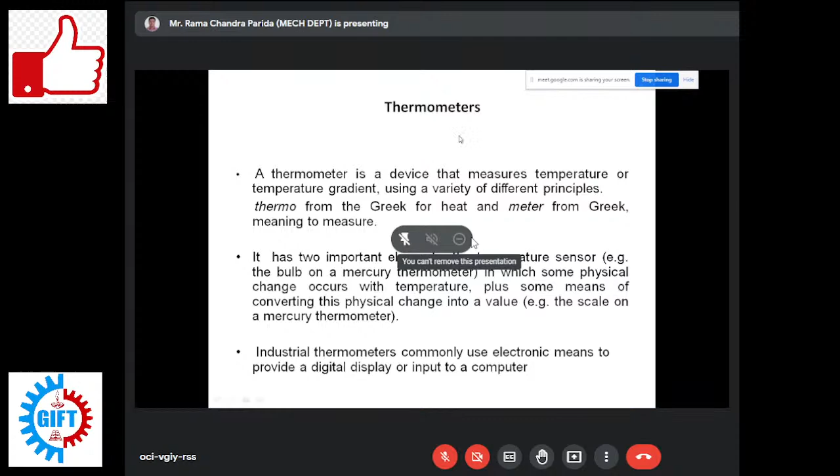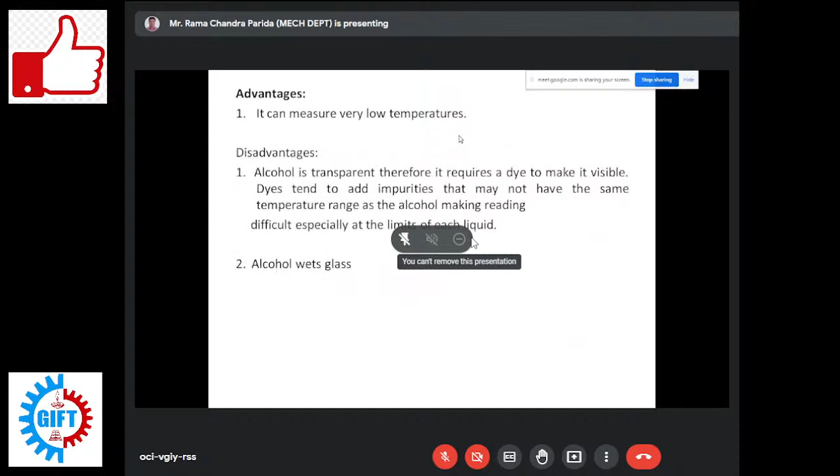This was the liquid in glass thermometer, which was discussed in the very last class. Okay. And what is the advantage of using alcohol, and what is the advantage of using mercury in that liquid in glass thermometer as a thermometric substance? Okay. So there is some potential toxic hazard of mercury, so we replace it with alcohol, but that alcohol can wet the glass tube, and also it is used to measure low temperature.

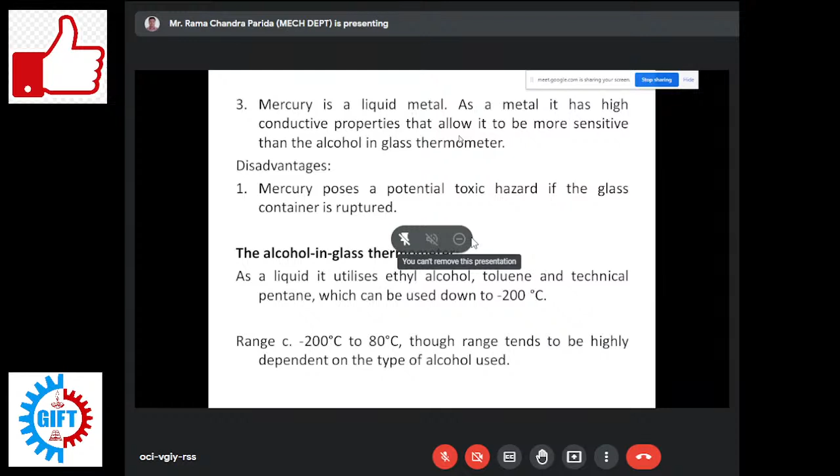Okay, then we started the bimetallic temperature measuring device. From its name, it is clear that it uses two different materials having different rates of thermal expansion. That means you can remember that the bimetallic temperature measuring device works on the principle that different materials have different rates of thermal expansion. When two strips of metals are bonded together and get heated, one side will expand and the other side will,

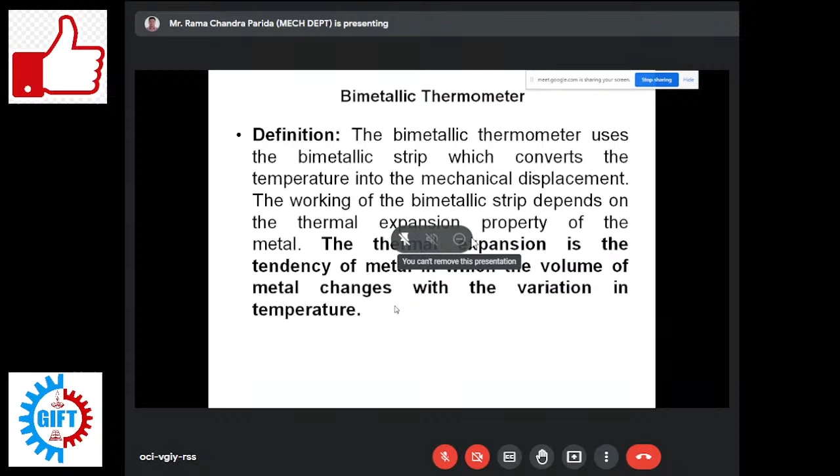that means one side will expand more in comparison to the other, and the resulting bending is translated into a temperature reading by a mechanical linkage. Okay, because the bimetallic strip has different thermal expansion properties, it bends, one end bends more than the other. This bending can be converted into a temperature reading by some mechanical linkage. That is the working principle of the bimetallic thermometer. You can see how it works. Here the bimetallic strip is bonded together, okay.

The metals are joined together at one end with the help of welding, okay. And since the bimetallic strip thermometer is constructed with two different metals, the length of the metals changes at different rates. So this is the working principle of a bimetallic thermometer. Here the bend of that plate or strip helps to record the temperature, hence its name is bimetallic

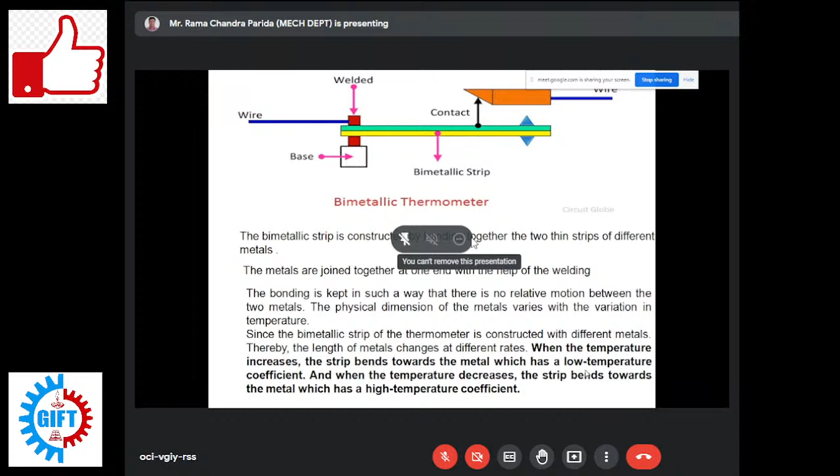thermometer. You have to remember this is another device, after the liquid in glass thermometer, used to measure the temperature of the body or system. Then you can see here how that strip of the plate gets bent when one end is heated, and this deflection can be converted into a reading of temperature through a mechanical linkage.

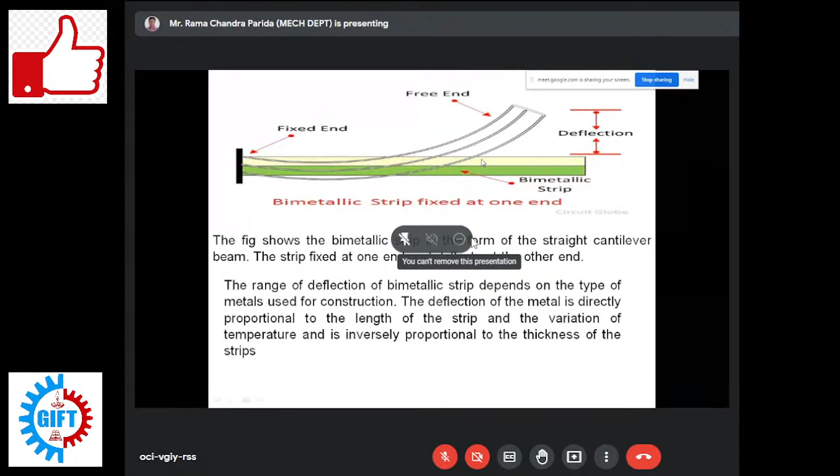You can see this is the bimetallic strip, and after the heating process, one end, called the free end, starts to bend, whereas the fixed end remains like that. That bending is called deflection, which is used to measure temperature in this bimetallic temperature device. How that bending happens, are you all able to identify it or not?

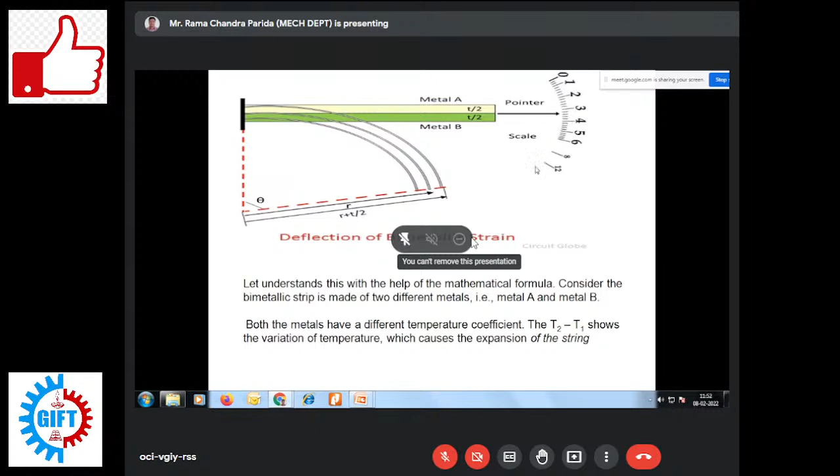This expression is not required for you because you only have to remember the working principle of the measuring device. So the diagram along with the working principle you have to remember and write. Suppose you are thinking how the spiral strip bimetallic thermometer works. In a bimetallic strip thermometer, when the spiral shaped strip is used, it measures ambient temperature because the thermal expansion property of the metal causes deformation in the spring with the variation of temperature. Here is the pointer.

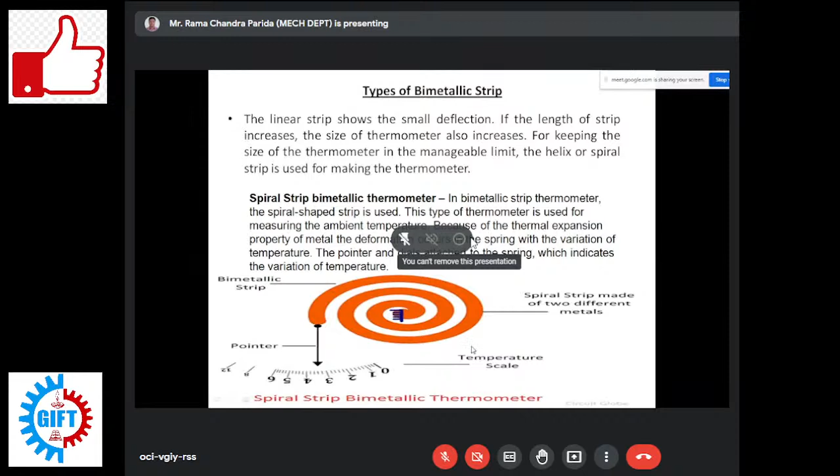Once this end is heated, it will expand, the free end moves, and it is graduated to some value, and corresponding to the pointer position, the temperature is recorded. Here another is the industrial type bimetallic thermometer. You can see how it helps to measure the temperature. It is another type of bimetallic strip, helix type. The earlier one was spiral type. Helix type bimetallic strip is mostly used in industrial applications.

Here a helix shaped strip is used for measuring temperature. The free end of the strip is connected to the pointer. The deflection of the strip shows the variation of temperature. This thermometer is simple in construction, robust and less expensive. Which one? This helix type industrial bimetallic thermometer. The thermometer gives less accurate results while measuring low temperature. That means this type of thermometer is used to measure high temperature. For low temperature, it will not show that accurate a value.

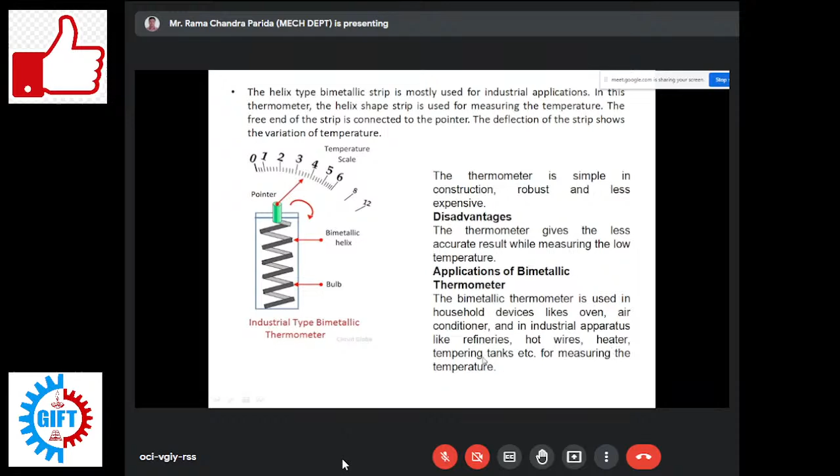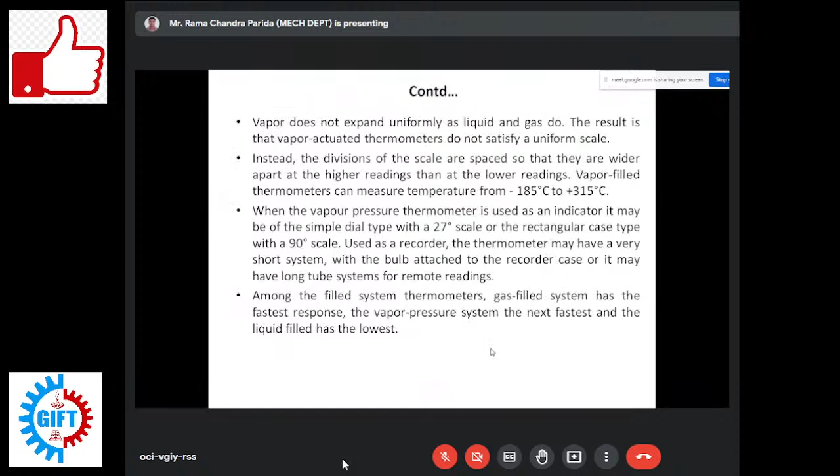And where is it used? It is used in an oven, air conditioner, industrial apparatus like refineries, hot wires, heaters, tempering tanks, for measuring temperature. Another one is the vapor pressure thermometer. This is not required. The gas filled: constant volume gas thermometer, constant pressure gas thermometer.

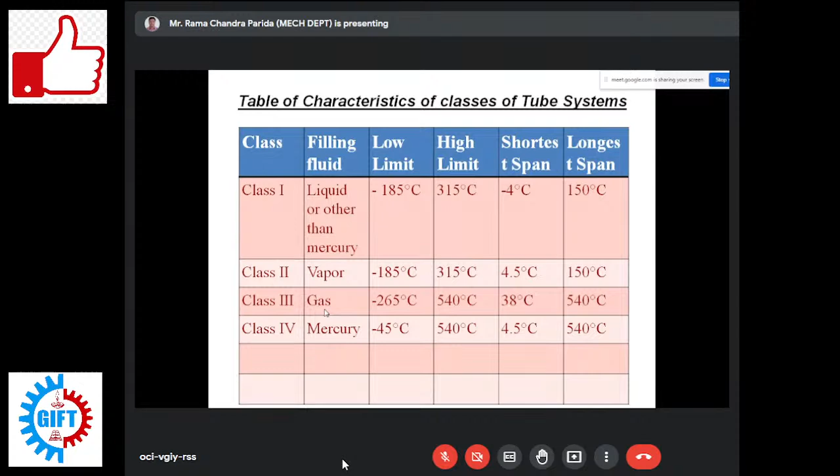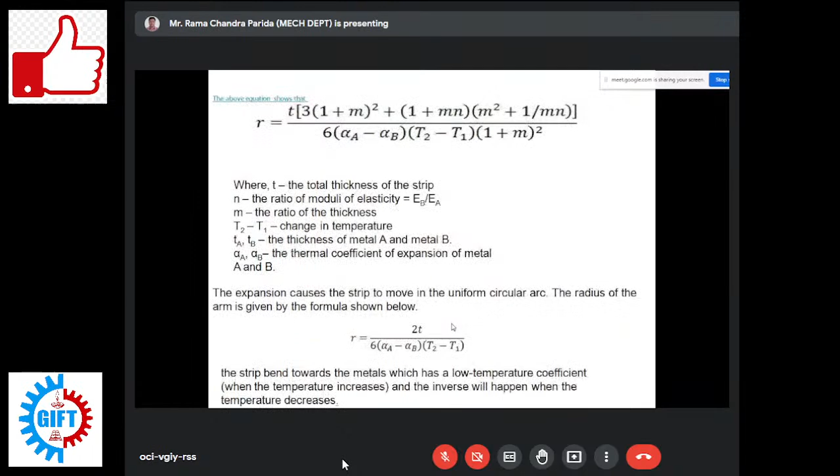You can see an EMF is generated. And this EMF is generated due to a combination of two effects: the Peltier effect and the Thomson effect. As the temperature goes up, the thermocouple EMF rises. This is the principle on which the thermocouple works.

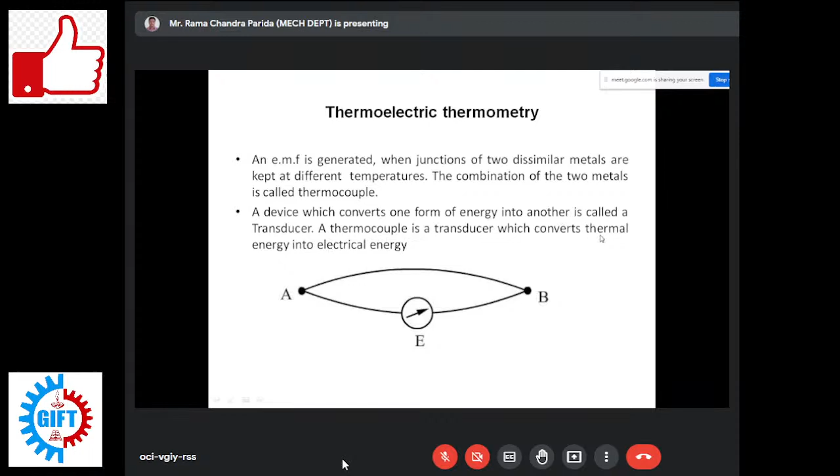An EMF is generated when the junctions of two dissimilar metals are kept at different temperatures. The combination of two metals is called a thermocouple. A device which converts one form of energy into another is called a transducer, and a thermocouple is a transducer which converts thermal energy into electrical energy.

Here you can see that because of two effects, your thermocouple works. One is the Seebeck effect. The magnitude of the EMF depends on the difference in temperature between two junctions. This is called your Seebeck effect. So dE_S is equal to alpha_AB dT. So you can see that EMF produced, capital E, S stands for EMF produced due to the Seebeck effect, is equal to alpha_AB. Alpha_AB is the Seebeck coefficient, and dT is the temperature difference.

So you can see from this expression that your magnitude of EMF depends on the difference in temperature between two junctions. Okay, so based on this effect, your thermocouple works. Remember, this first one is the liquid in glass thermometer, second one is the constant pressure gas thermometer, constant volume gas thermometer. Then we discussed the bimetallic temperature measuring device or bimetallic thermometer. Then we are discussing the thermocouple.

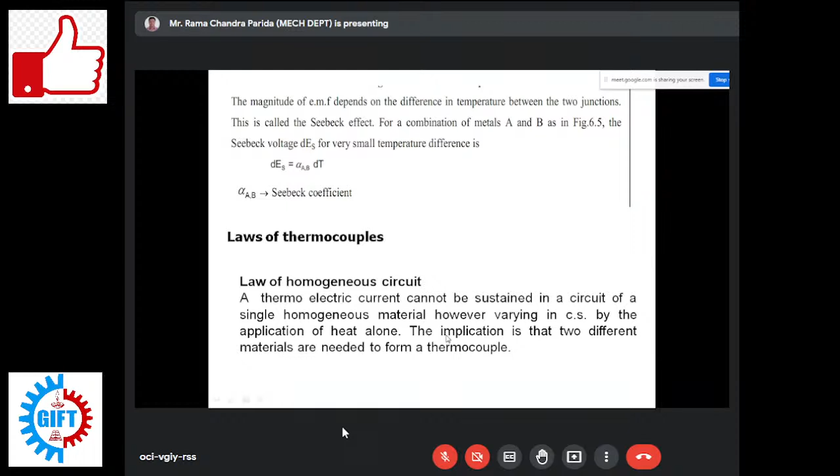So the bimetallic temperature measuring device works on the principle that two different metals have different rates of thermal expansion, so because of the resulting bending, your temperature is read by a mechanical linkage. So that was the principle. You remember, I repeatedly told you that this is the principle you have to remember along with the diagram, and then we can write it. Then we are discussing this thermocouple.

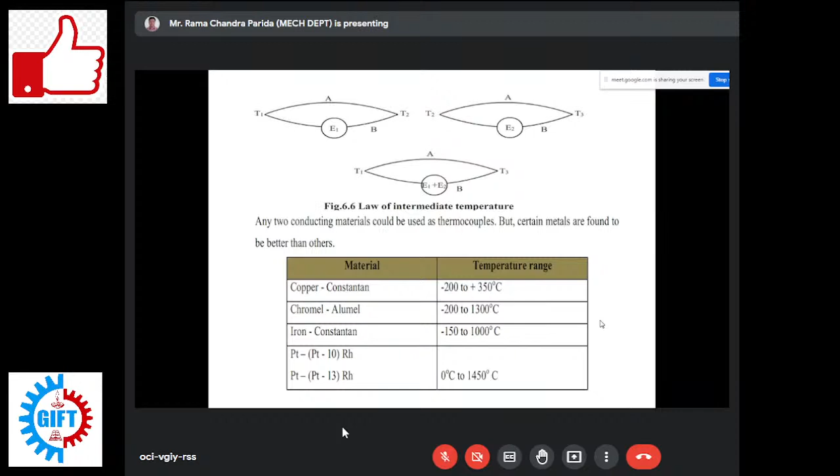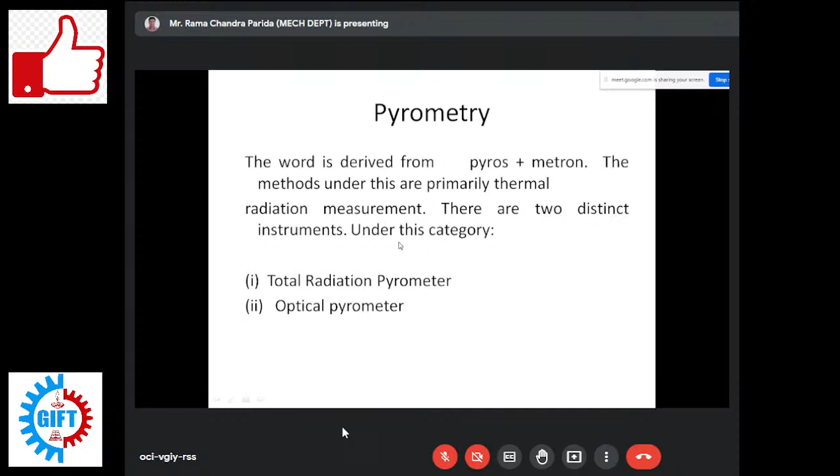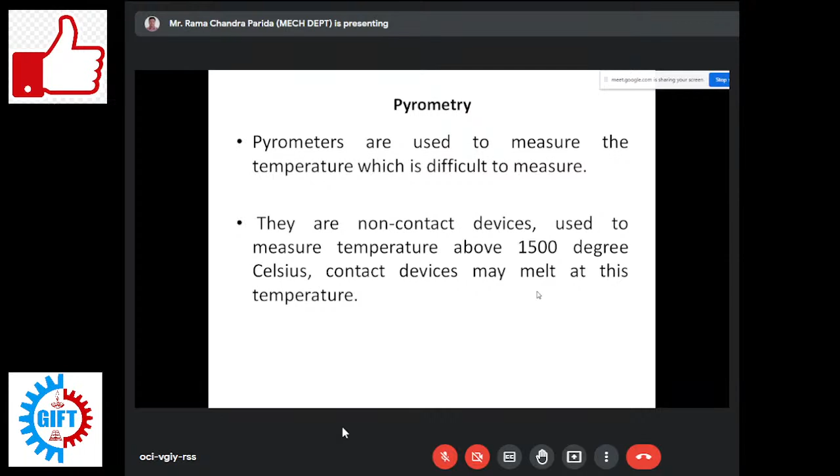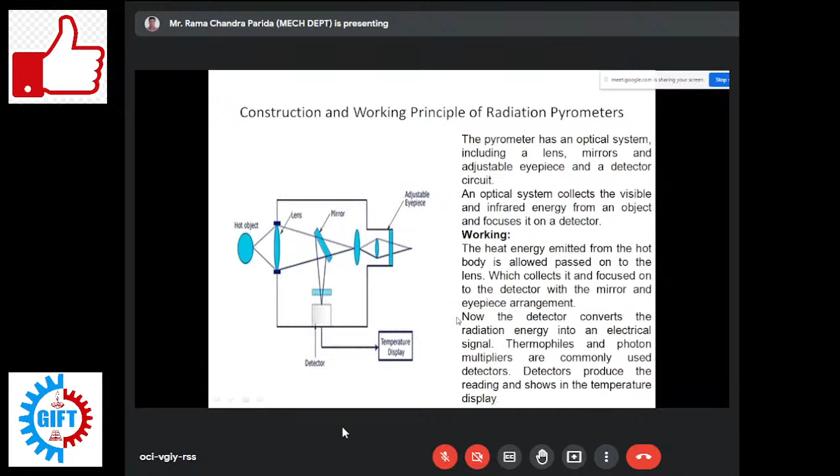So heat energy emitted from the hot body is passed on to the lens, which collects it and focuses it on to the detector with a mirror and eyepiece arrangement. So now the detector here, you can see in this diagram, converts the radiation energy into an electrical signal. That is displayed in the form of temperature. So this is the working and construction of a radiation pyrometer.

Advantages are low cost and no need of contact. This is non-contact type, fast response. It gives the response with more speed, faster response you can call. The disadvantage is that emissivity errors are introduced.

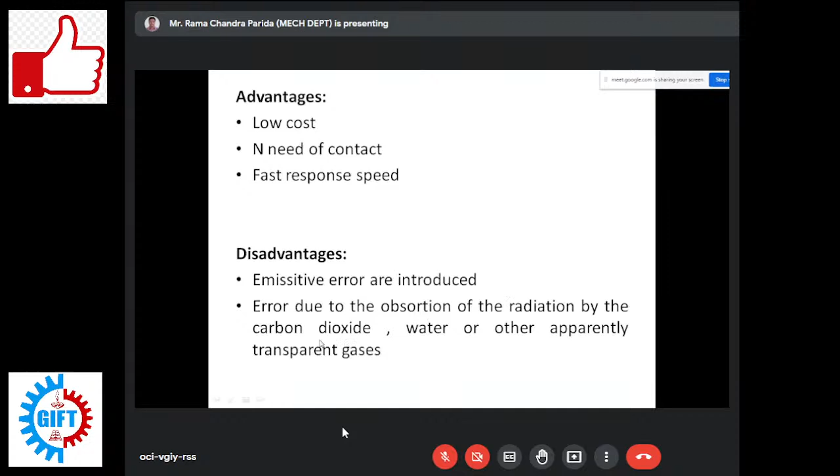The pyrometer working principle is that when the temperature being measured is very high and physical contact with the medium to be measured is impossible or impractical, pyrometers based on the principle of thermal radiation are used. So always remember, the pyrometer works on the principle of thermal radiation. And from the definition it is clear that it is used to measure high temperature. These pyrometers are used under conditions where corrosive vapors or liquids would destroy thermocouples, resistance thermometers, and thermistors if made to come in contact with the measured medium.

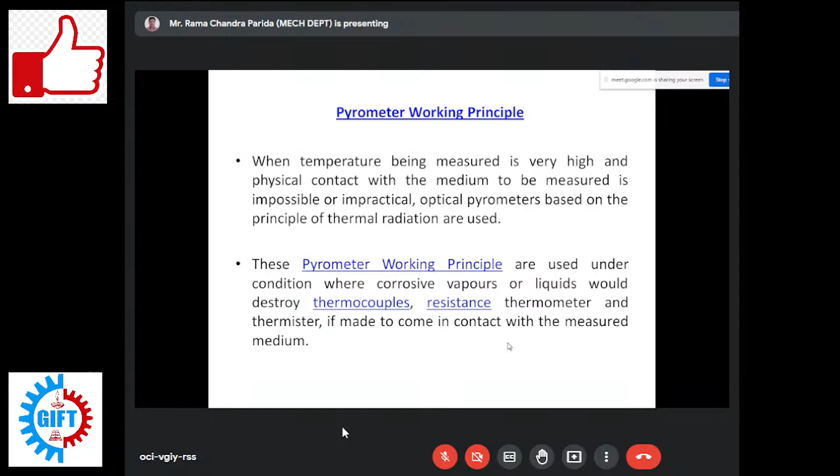So now here it is continued. You can see the radiation pyrometer measures radiation energy emitted or reflected by a hot object. You can see how it gets concentrated through that lens onto a black body detector, a temperature detector we can call, that supplies it in the form of an electric signal which gets displayed in the form of temperature.

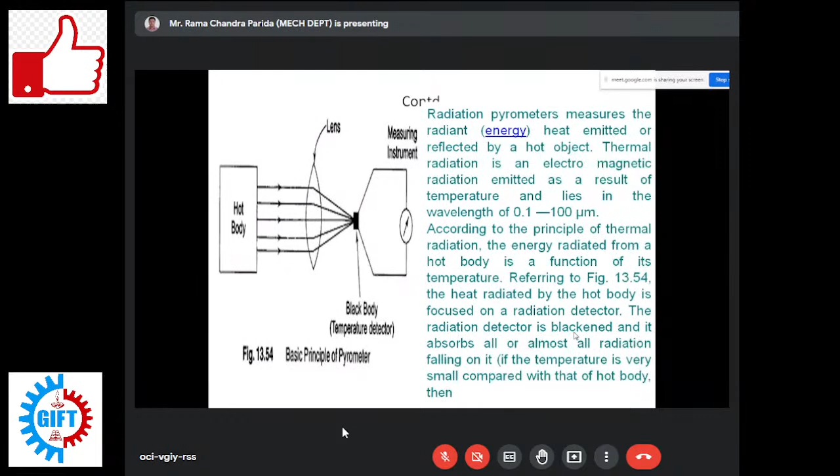Radiation pyrometers are of two types: total radiation pyrometer and infrared pyrometer. Previous class, some of you told me that sir, infrared pyrometer is also used to measure the temperature. Now you are able to find how it measures temperature, working on the principle of thermal radiation.

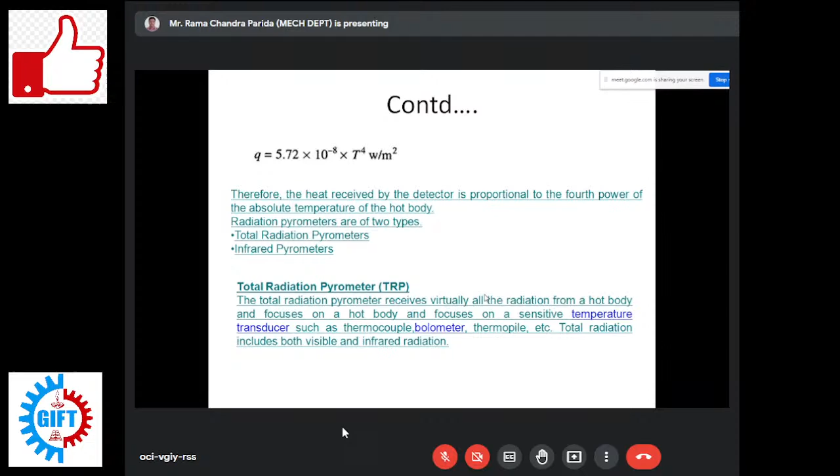Total radiation is proportional to the fourth power of absolute temperature. Okay. So total radiation pyrometer cannot be used for measuring temperature lower than 600 degrees centigrade. Some of the devices are not able to measure temperature up to 600 degrees centigrade, but a total radiation pyrometer starts its reading from beyond 600 degrees centigrade.

Total radiation pyrometers are mostly used for a temperature range of 1200 to more than 3500. Basically, this is the blast furnace. Furnace temperature is around 1500, 1700. There it is also used. Output from total radiation pyrometer, whether amplified or not, is usually taken to a PMMC instrument or to a self-balancing potentiometer.

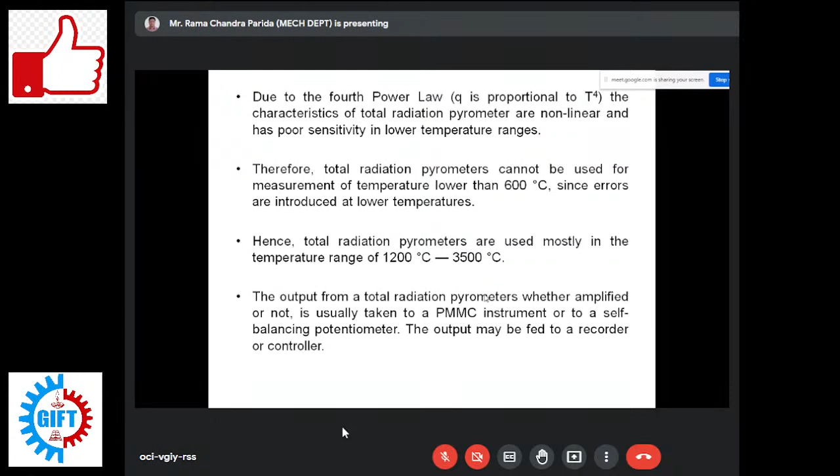Infrared pyrometers are partial or selective radiation pyrometers, and they measure temperature above 550 degrees centigrade. It uses the infrared principle; thermocouples and bolometers are used. Also, various types of photoelectric transducers are most commonly used for infrared transducers.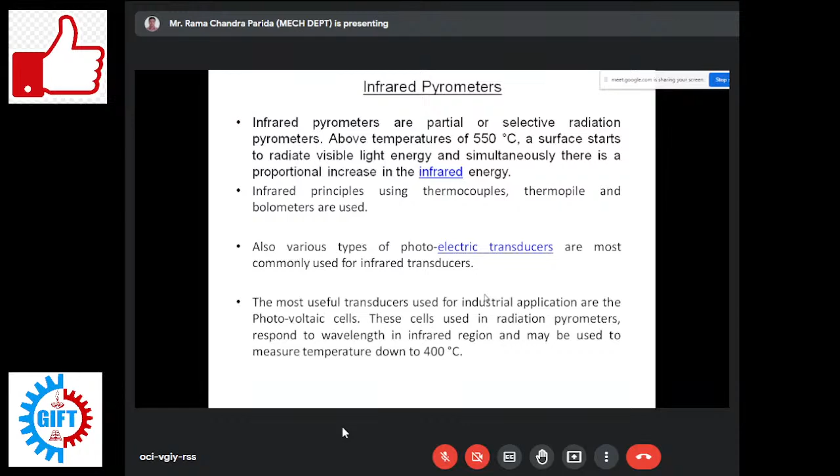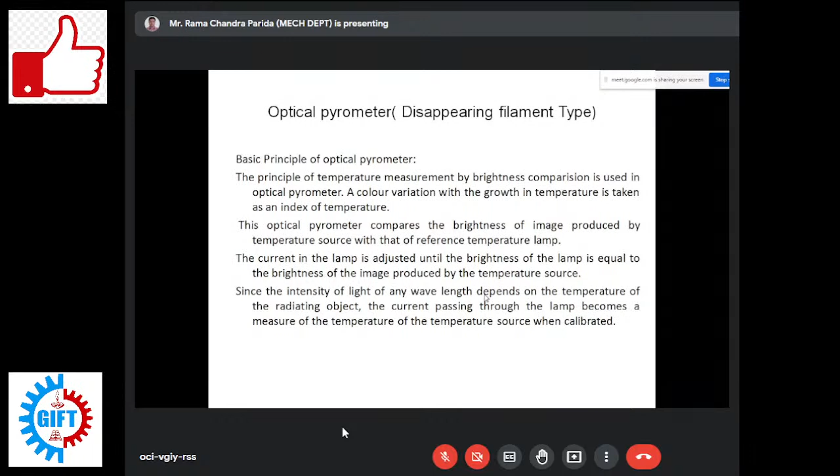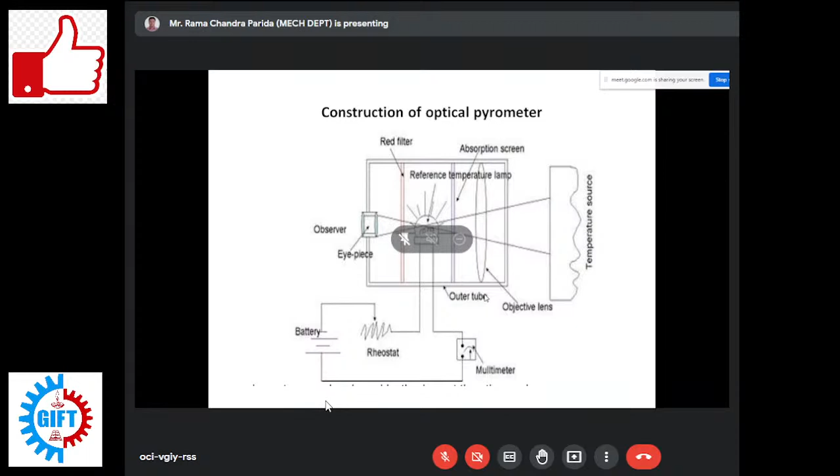This one is optical pyrometer, disappearing filament type. Here, the principle of temperature measurement by brightness comparison is used in optical pyrometer. A color variation with growth in temperature is taken as an index of temperature. This is the construction of optical pyrometer. Temperature source is there, the eyepiece, red filter, absorption screen, as you can see from this diagram. Here one red filter is marked, okay.

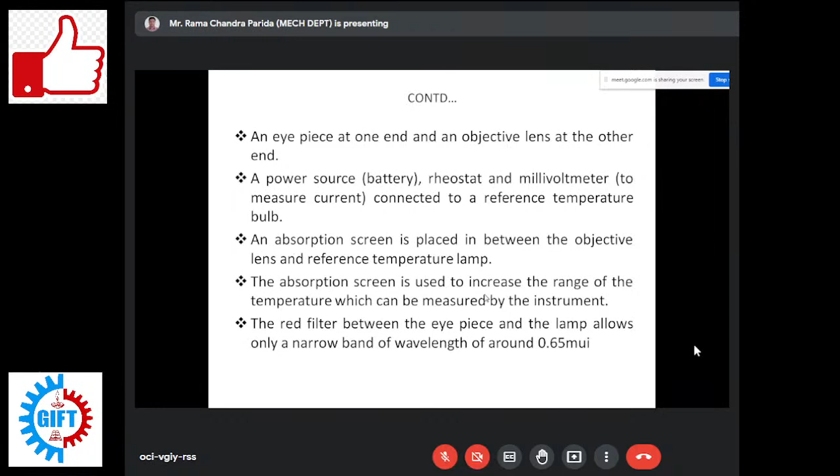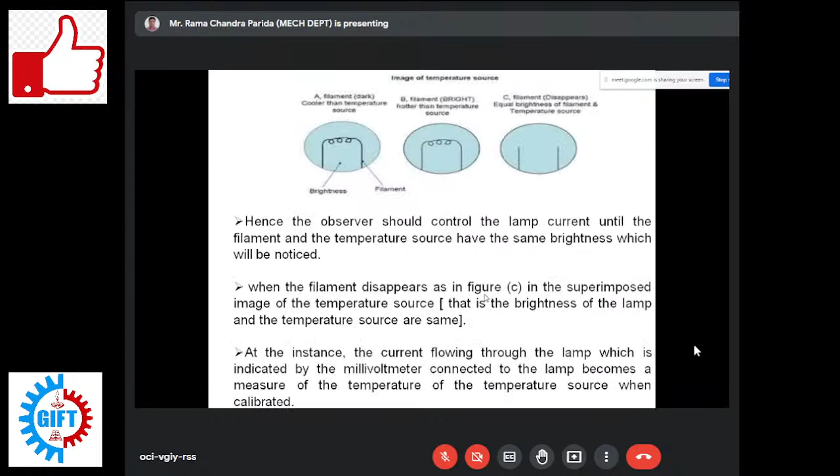It is placed between the eyepiece and the lamp to allow only a narrow band of wavelength of around 0.65 micron. So this is the operation of pyrometer as discussed and explained. This is the image of the temperature source. Now come to the application.

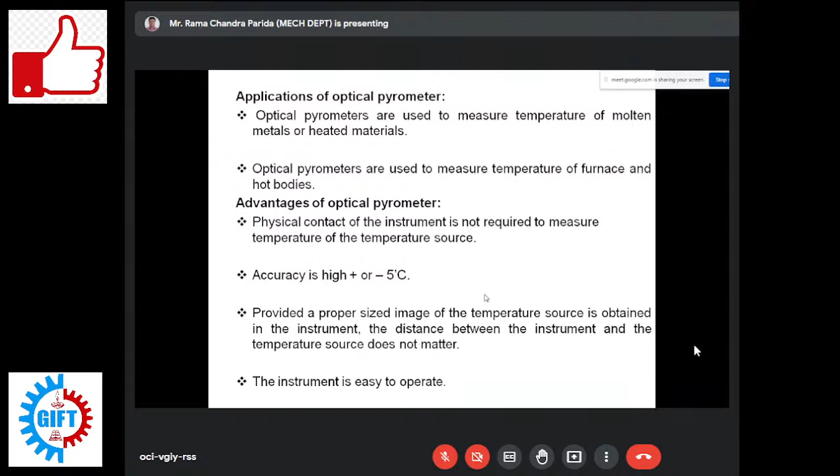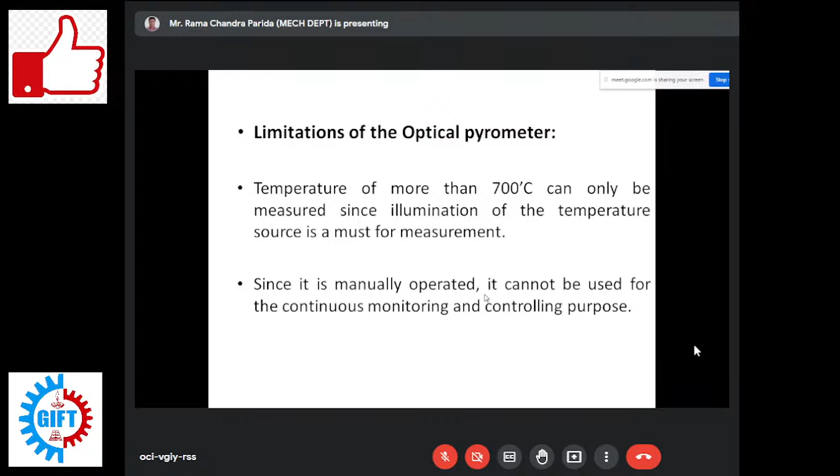And what is the limitation? Temperature more than 700 or around 600 can only be measured, since illumination of the temperature source is a must for measurement. That means it can measure only above 600. Sometimes you find 550, here it is mentioned 700. Since it is manually operated, it cannot be used for continuous monitoring and controlling purposes. This is the major disadvantage of optical pyrometer.

This is all about the types of temperature measuring devices. It starts with the first one, liquid in glass thermometer. Second one, bimetallic thermometer. Third one was thermocouple. Fourth one was pyrometer. So all these are temperature measuring devices. Next we will discuss pressure measurement.

So now we have to identify some devices which are used to measure pressure. Sorry. This is better.

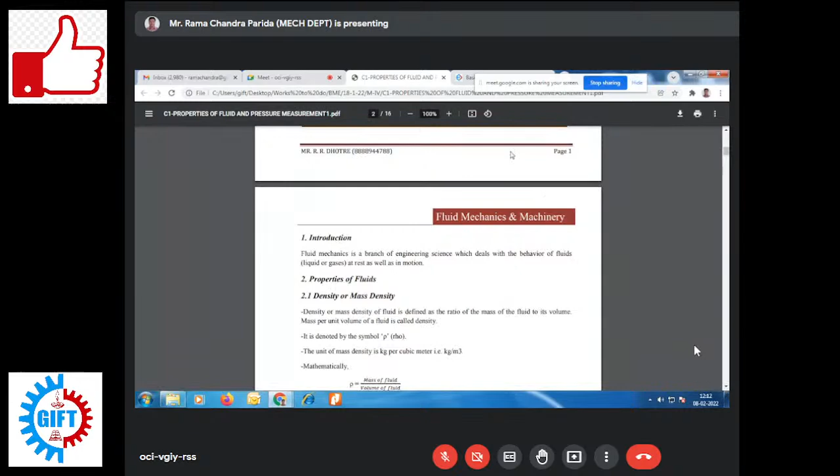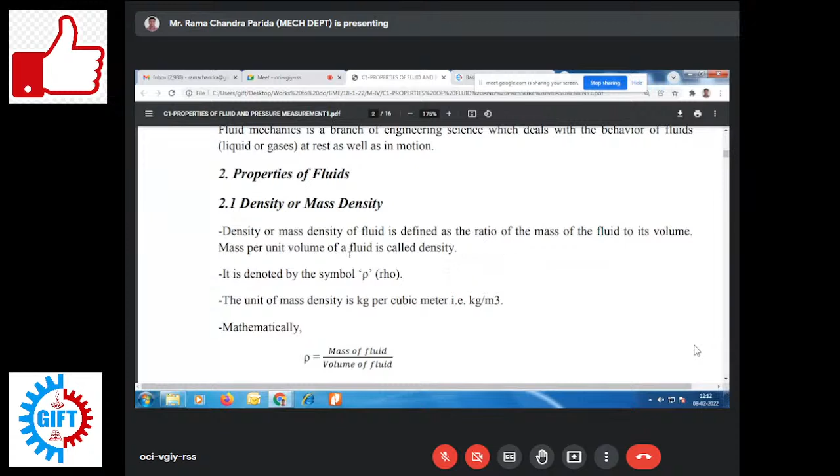As you know, pressure equals rho g h, P equals rho g h, with h the height of the liquid column. You can see. Just wait.

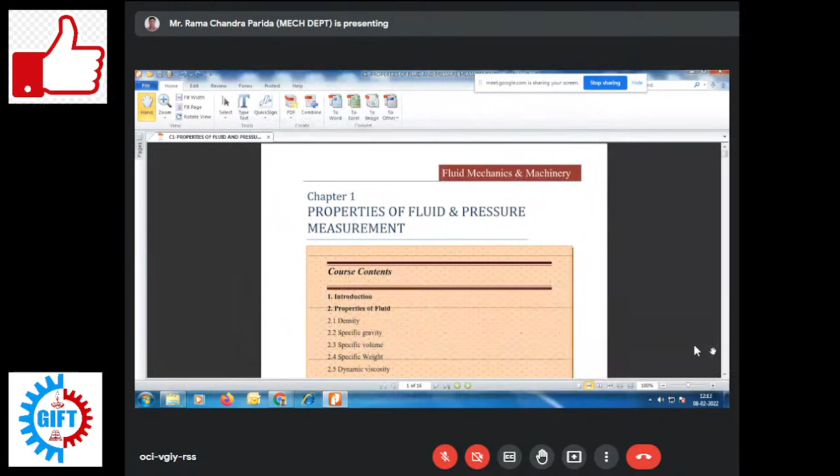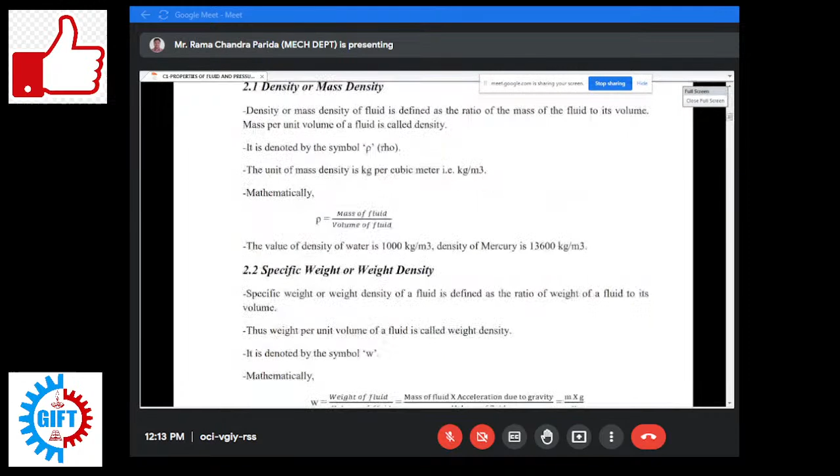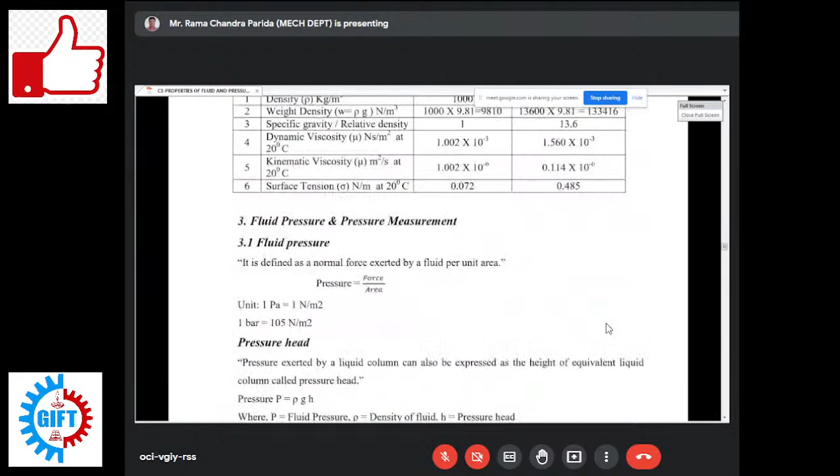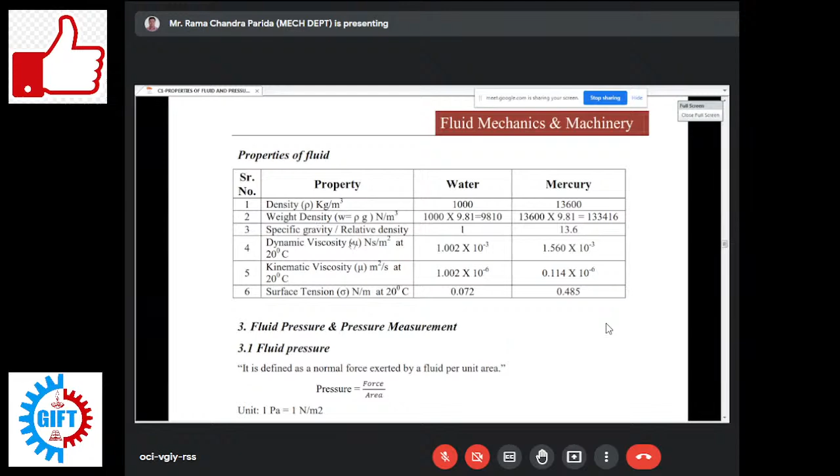You can see density. What is density? What is specific weight? What is specific gravity? Already discussed as one of the fluid properties. These are the things you have to remember before we start fluid pressure and pressure measurement: density of water, weight density, specific gravity, which is also called relative density.

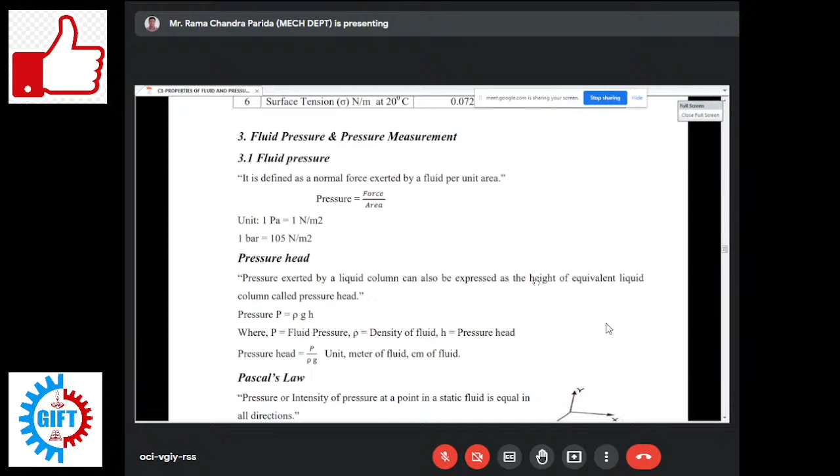Now we start with pressure and pressure measurement. So what is fluid pressure? Fluid pressure is defined as a normal force by a fluid per unit area, as already discussed, measured in Pascal.

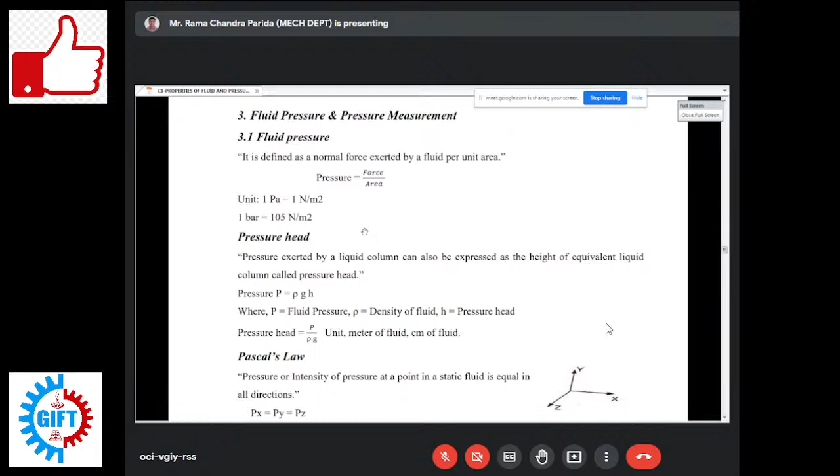Pressure is also measured in bar. 1 bar is equal to 10 to the power 5 Newton per meter square. It was wrongly written as 105 due to a typing error, but you should read it as 10 to the power 5 Newton per meter square, or equivalently 10 to the power 5 Pascal.

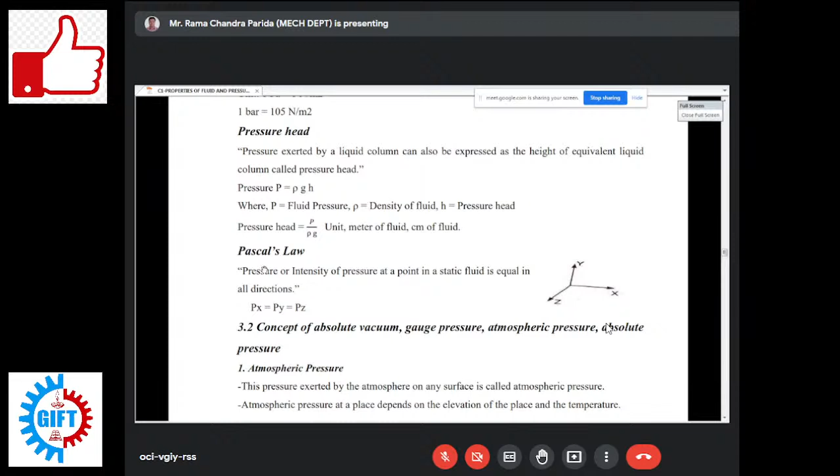So now what is pressure head? Pressure exerted by a liquid column can also be expressed as the height of an equivalent liquid column, called the pressure head. In the expression P equal to rho GH, that height H, the pressure head, can be calculated by P divided by rho G.

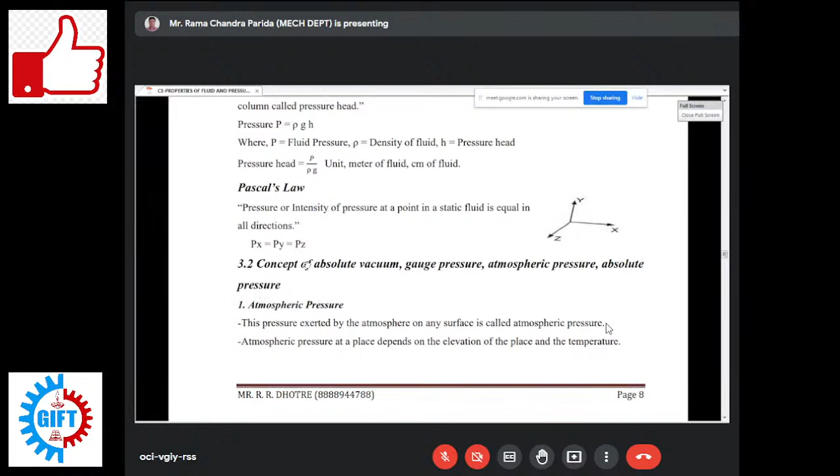And while discussing pressure, we have to remember what is Pascal's law. This may come as a 2-mark question in your semester examination, and you should always be prepared on absolute, gauge, and vacuum pressure.

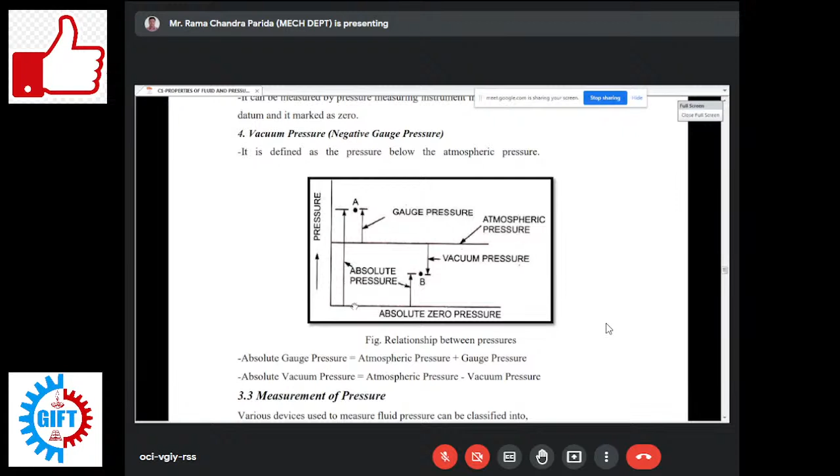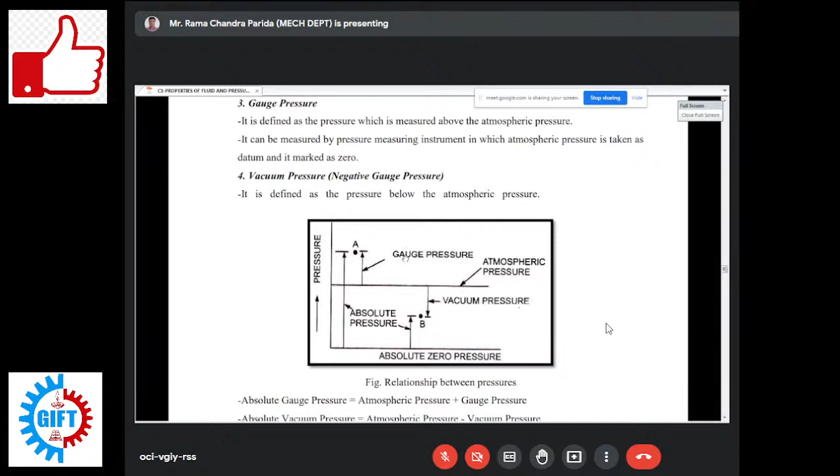Yes sir, I remember. Suppose if you want to find pressure at point A, you can see that point A lies above absolute zero pressure, so the pressure corresponding to point A is above absolute zero pressure. Point A also lies above the atmospheric pressure line. From absolute zero pressure to the atmospheric pressure line, that range is considered atmospheric pressure. Since point A lies above the atmospheric pressure line, the pressure corresponding to it is called above atmospheric pressure, and if measured, it is called gauge pressure. So pressure at A is equal to atmospheric pressure plus gauge pressure. Positive gauge pressure is called gauge, and negative gauge pressure is called vacuum.

Absolute pressure is defined as the pressure measured with reference to absolute zero, since there is no pressure less than absolute zero pressure.